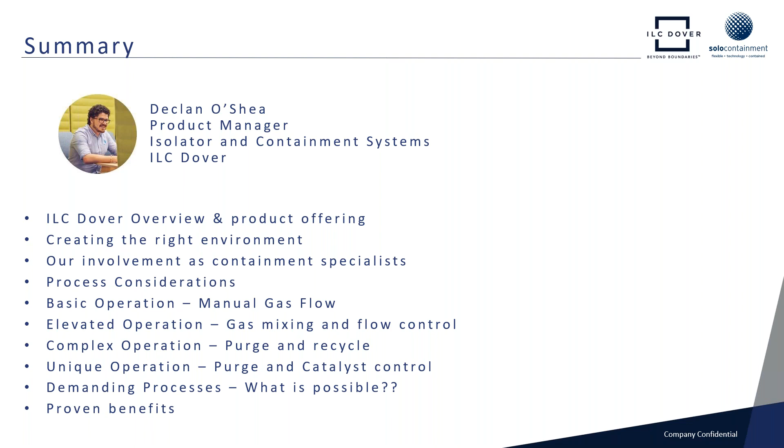So to quickly start with ILC Dover as a company, primarily we are a manufacturing and engineering company. We engineer solutions for our customers, turning requests, queries and problems into solutions, if you like. We started pre-World War II manufacturing latex products. ILC stands for the International Latex Corporation. And the Dover is because it's based just outside Dover in Delaware in the US. But we've grown from making army uniforms in World War II through to making spacesuits for the NASA missions. We still do that today.

Through to making a lot of pharmaceutical products, making single-use bag systems for powder transfer, powder containment. Now moving into the biologic space with liquid bags and fluid transfer assemblies. And then we also make isolator systems, which I'm going to go over in a moment. We have presence all around the world, North America, Europe, and now a large presence growing in Asia. We've just hired just under 40 new people in Asia, with much bigger reach in that region, to see where our products can help out there.

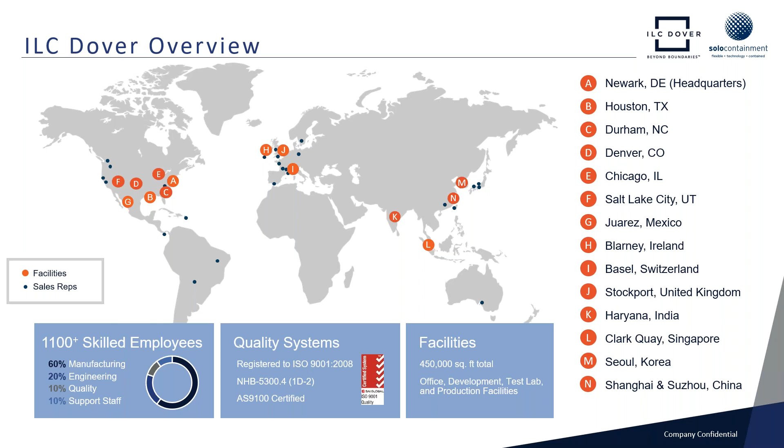So, I was touching on the products that we have, primarily in life sciences. We work in the pharmaceutical and biopharmaceutical industry.

Pharmaceuticals are a lot of powder transfer systems with flexible IBCs, powder bags for excipients and products. And then flexible containment systems, which is what we're going to talk about today. PPE, we have quite a broad range of personal protective equipment. And then on the biopharma side, we handle a lot of single-use powder applications, media, buffers, things like that. Sterile manufacturing isolators, creating grade A sterile airflow, and then liquid handling solutions in the form of 2D liquid bags.

Now, what I'm going to talk about today will be a crossover between pharmaceutical and biopharmaceutical, I would say. We've seen low humidity and low oxygen being required in both of these spaces, depending on the application. And then some of those applications are what we're going to go over today.

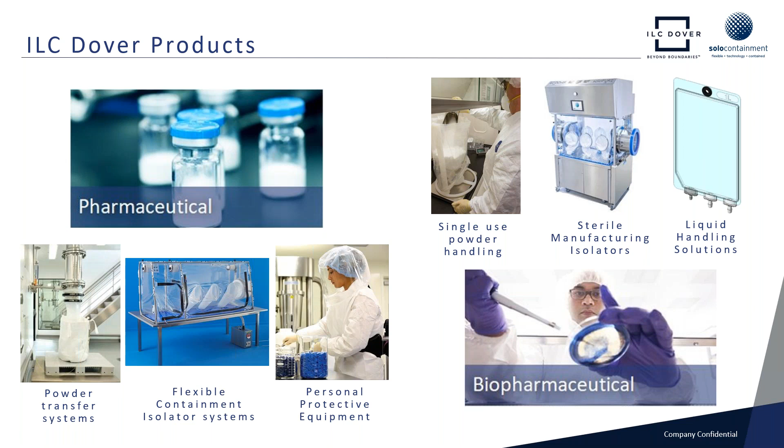So to kick things off, when I talk about an environment, what I'm saying is that generally, in order for your product to be handled inside of a place where you are not going to see any cross-contamination or any adverse effect while handling the product, and the same where you're not going to induce any hazardous effects to your operator, you are generally creating an environment that is suitable for both sides of the process. So yes, you can call it containment, you can call it an isolator, but realistically, how the air flows in and around the system is what creates that suitable environment and that working space for the product and operator.

So going through some of the different examples, if we're talking about cell banking, a lot of the time you're looking at low oxygen anaerobic environments, for which we talk about nitrogen gas saturation, which is the topic of today. Then move to something like ADC compounding, where you're looking at highly potent toxic materials. You'd be looking at a high containment system using a closed barrier, negative pressure airflow. Or maybe you're looking at fill finish, where we look at a sterile environment with a low particle count, low bioburden, in order to maintain true sterility in that process.

And then maybe you're looking at dry powder inhalation. You need a low humidity in order to prevent any moisture gain there. And then we'd look at compressed dry air saturation, which again is something we're going to talk about today, and then talk about the difference between these. But what I'm trying to get across essentially is that you can pretty much utilize most systems to operate in, but if you don't create the right environment for your product, your process is not going to work correctly. So I'd just be cautious when you're looking towards handling specific products or processes that you consider what environment you're going to be using.

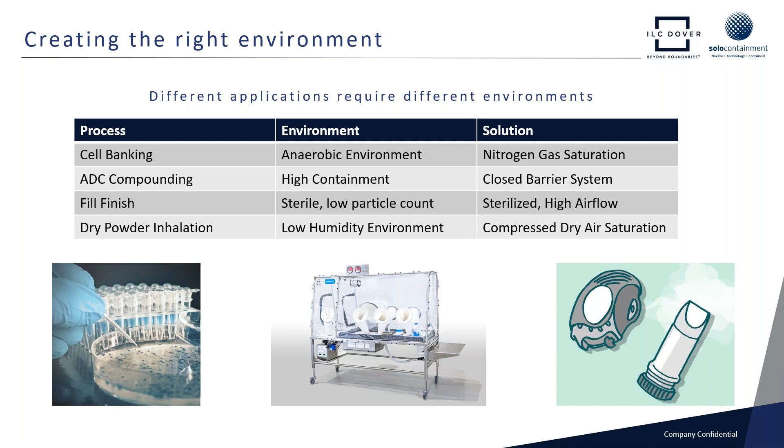So, how can we speak towards what we're speaking to today? My experience comes namely from being in the sales team, sales engineer, then a sales manager, then moved to be a product manager. And really, it's the fact that as containment specialists, we are approached by customers with a broad range of applications across all industry sectors, not just life sciences. So we're approached by the nuclear industry, the atomic industry, for any sort of containment application where there is a requirement for containing hazardous materials or protecting a product inside. In the nuclear industry, for instance, there are a lot of anaerobic glove boxes that are used, and we see requests coming in from that side.

And I'd say, as a company, we see maybe 3,000, 4,000, 5,000 different opportunities and inquiries every year. We don't necessarily convert all of those, but we do gain experience every time we approach a new opportunity as far as saying, how can we solve this? And then we tie all those combinations together to create a single portfolio of new product innovations, which can lend to all the markets by using the experience of different sectors. Because ultimately, containment is required all over, not just in pharma and biopharma. So we try and lend those experiences to cater for those sectors.

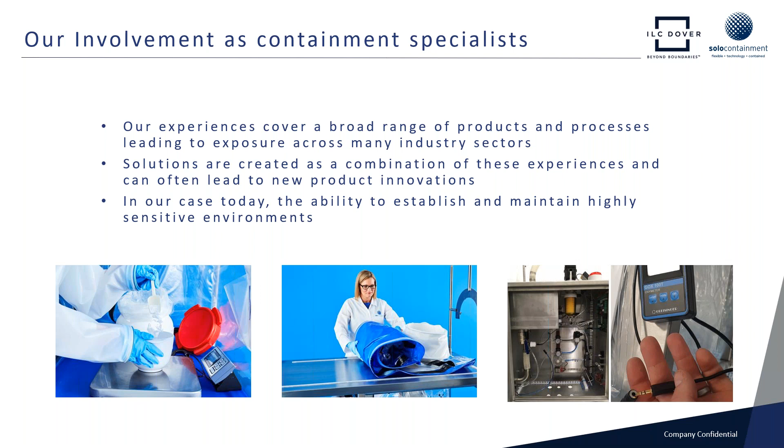So, process considerations. You're going to ask yourself at the beginning of your process, or before you even conceive how you're going to do this, what is the best way about doing so?

I know, for one, that I'm going to need a low oxygen environment. We need to work under sort of 1 or 2% oxygen in order for this product not to oxidize and change form. If you do, then that product will be lost, the batch is lost, and then that's money and time down the drain. So you need to make sure you observe those conditions inside. So what is the best way to go?

So realistically, when you're looking at gas usage, a lot of people will ask, what gas do you recommend? The most common is probably nitrogen. Second comes argon. But really, any inert gas, or a heavier gas than oxygen to offset the oxygen content within the closed chamber, can really be used for any of these applications.

We just generally find that nitrogen is a lot easier to generate and come by, be it in bottles or with a nitrogen generator on site. Generally, a lot of larger facilities will have those. That's generally what you're going to be needing.

Sometimes in extremely low conditions where you're looking at maybe ppm or sub 1% oxygen levels, you'll be looking at pure nitrogen or pure inert gases in order to really obtain the levels that you're looking for. I know with certain anaerobic cell banking practices, some of the levels you're looking at is 100 ppm, 10 ppm in some very rare occasions. And for that, you would require an extra pure form of nitrogen in order to ensure that the oxygen content has been scrubbed down.

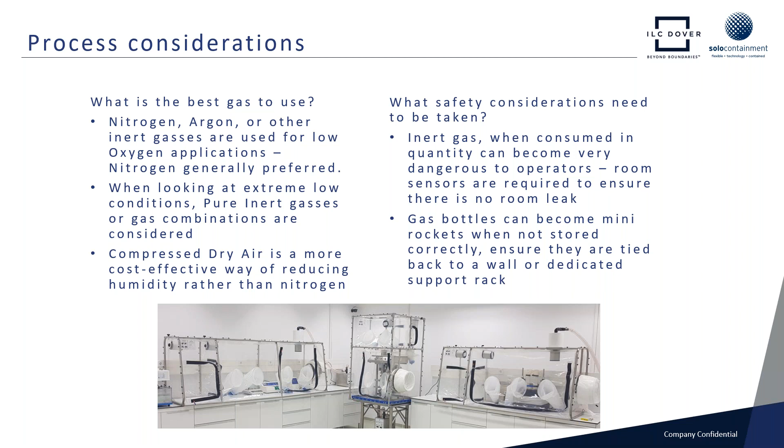And then more of a practical concern, things like gas bottles can become, I just put here, mini rockets. Essentially, if they're not handled properly, if they're dropped or ignited in any way, then there can be grave concerns with those things flying around the room. So please ensure that they're in a dedicated rack or tied back to a wall, or consider your safety concerns when handling those.

Now, what we're going to get onto now is essentially the 4 different types of systems, based upon the levels of control that you require. So when you're looking at obtaining environments inside of an isolator, not all of the time you're going to require such strict considerations around your process. Sometimes you may not require 1% relative humidity or 1% oxygen or even 10%. You might just want to provide a blanket for a very basic experiment where you know that you need below 10% oxygen, maybe 20% content inside.

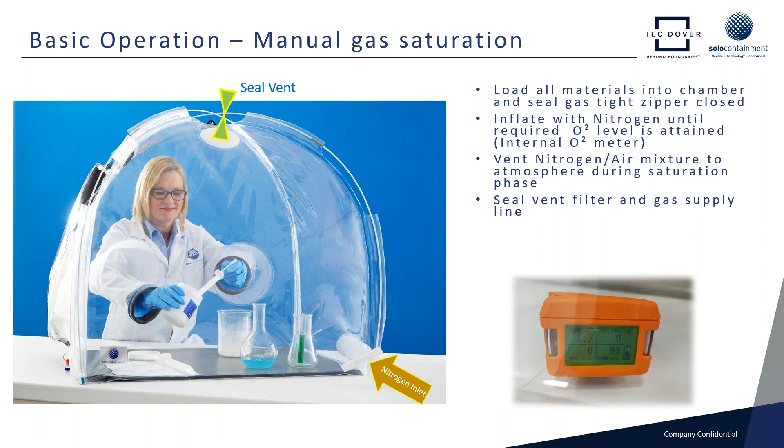Inflate the containment system with nitrogen. Have an O2 meter inside so you can read the oxygen content as you go. Make sure that you're venting the nitrogen off the top of the isolator through the sleeve provided, so it doesn't blow up exponentially and then possibly rupture the system. It would take a lot, but it is possible. And then just balance that gas supply manually with a sort of trickle feed in order to maintain the oxygen content that you require. We, of course, can show you exactly how to do this. We've got full manuals on how to operate basic systems like this, and for some people, this is pretty much all that you would require to create that very basic environment that you want at a very low relative cost.

Perhaps you're actually looking for something a little bit more. Perhaps you're looking for a more controlled environment, maybe some more accurate readings, something that you don't have to manually control. Then you consider the next step. You're not going to go the whole hog. You don't want a fully controlled PLC system. You want some kind of halfway system that will do for your process, that gives you repeatability. So when you look towards a system, this is just an example of one we've provided before, where you have a 6-sided contained system, and then you have a gassing tower on the side.

Now, this gassing tower would allow you to set a trickle feed of nitrogen or compressed air into the system in order to saturate the environment. And then the exhaust fan draws a pressure feedback from the main chamber to exhaust the air out at a steady rate that balances with the air coming in. So essentially, through some calculations that, of course, we will provide and set up for you, we could maintain a negative pressure based on the fan speed with the injection of nitrogen in order to keep a constantly saturated environment while you're working inside. Now, these systems have been proven down to around 1% oxygen content inside, in a relatively controlled state.

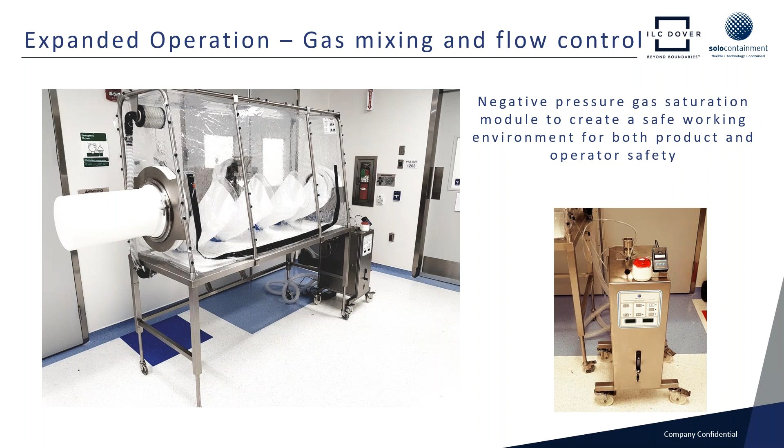So if you want to take things one step further, which of course a lot of people would do, if you're running a process that requires a lot more control and a lot more, let's say, reassurance in regards to the levels that you have, with a bit more flexibility, you could opt for a more comprehensive system. So you could look towards having an environment which was made of 2 chambers. Perhaps you wanted to load materials and pass them through, guaranteeing that you have the same environment in your antechamber as well as your main chamber.

But then you might also want to record this data. You might want to have feedback from the sensors. Maybe you're running under a 21 CFR Part 11 compliant data integrity scheme at your facility, and you need to record that data. Something like this would provide all of that for you, as well as allowing you to change the set points in order to say, okay, for this particular process, we're going to require a 5% oxygen content inside. We maybe don't need to use that much nitrogen for that longer time. So let's create that set point there.

And then maybe you're running a different process the next day, with a different product, single-use film. You can make the changeovers very easily and efficiently. And then you change your set point down to maybe 1% oxygen or relative humidity content for the next process. So a gassing unit like this with a versatile PLC will really allow you to change that process up in order to provide something that's a little more versatile than the previous 2 units that you've seen there.

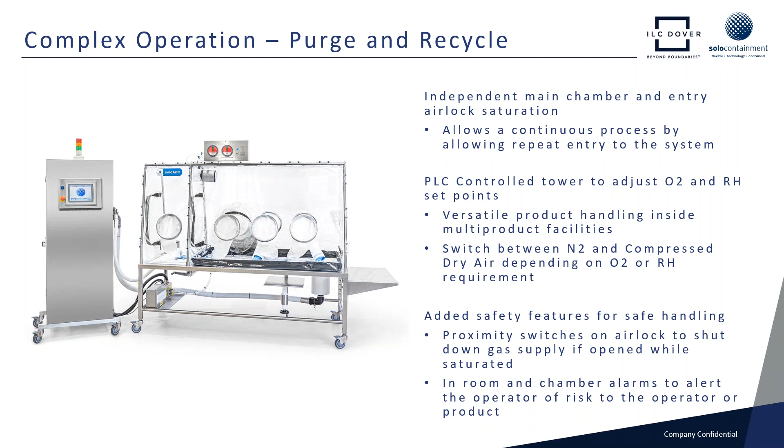Then the final one that we're going to talk about as far as examples for today is probably the most unique and certainly the newest for us: we, in cooperation with a partner of ours, have developed a system where we've created a single-use isolator chamber, which is a 6-sided structure that can be fully disposed without any required cleaning validation. You'd simply place up a new film and start on your next process.

But we worked with a customer that required ppm levels of oxygen inside their process. Now, this was for anaerobic cell banking that I mentioned before with a customer in North America. And what they required was a 10 ppm environment to be maintained for a number of days, a number of weeks actually. It was about 16 days in total that they needed to maintain this environment. So we knew, what do we have to look at here in order to ensure that we maintain that level of environment for such a long time.

Bear in mind that when we're talking ppm, this is parts per million of oxygen within a certain volume of air. It's unfathomable to consider these sorts of levels under normal circumstances. Hence why we sought to cooperate with a specialist that knows how to handle these environments. So what we did from an isolator perspective is we looked at all the possible leak pathways that could be developed when you have a system like this.

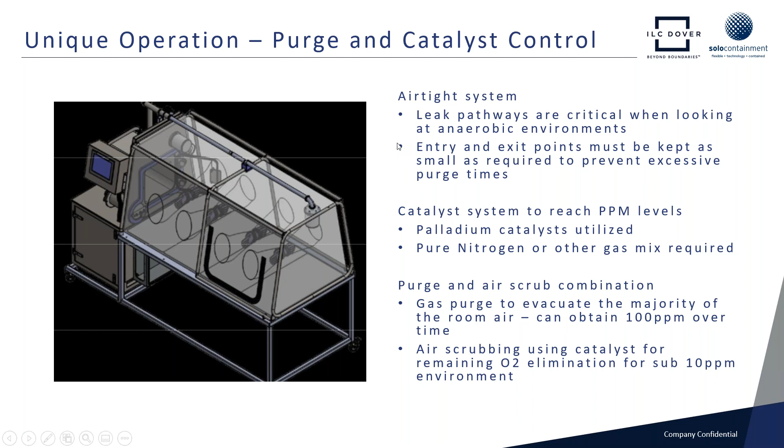Now, going on to something that might be a little bit more demanding. So I'm speaking relative terms with the previous examples towards a single process type. So I'm saying low oxygen, low humidity, using nitrogen or compressed dry air only to create that environment.

So I've come up with a few examples that we have here, and these are all examples that we've catered towards before. And as I said right at the beginning of the presentation, as containment specialists, we have a broad range of knowledge across many different industries that allow us to combine these together to create the correct environments and combine our previous solutions that we know have worked, independently, to bring them together to say, okay, we made this work in this way, we made this one work in this way, so how can we make them work together?

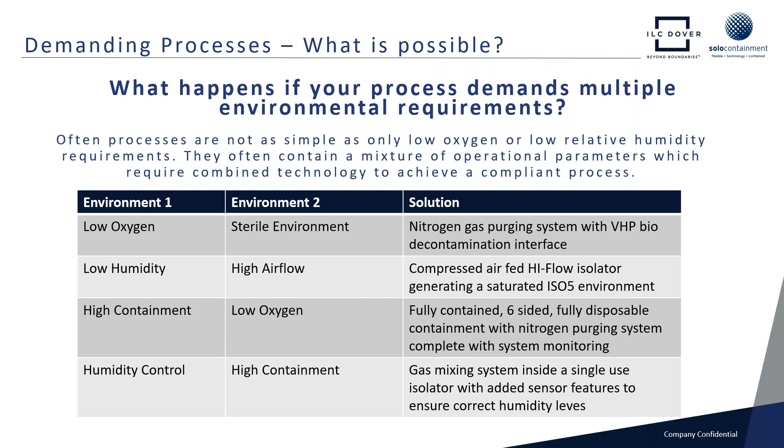So just because you may think that your process is a lot more complicated or has many different steps or considerations, it doesn't mean that there isn't a solution out there for it. You'll find that a lot of containment providers are approached by many different customers to contain many different products and processes, and often they can add two different processes together to come up with a solution that you're looking for.

So the one final thing here, just kind of take-homes for today's talk, is the choices that you put into it and safety really do matter. Before you run this process or even purchase any equipment associated, just make sure you're choosing the right sort of input. Are you using nitrogen where compressed dry air could be used? Are you trying to use nitrogen when you might need a more pure source of it in order to obtain lower levels?

What sort of impact is that going to have on the room and the facility and the operators around it? Sometimes people can jump feet first into these applications without truly considering all the background that might be required. So, take away what I've given you today to say, let's look into these other things. Am I suitable within the environment that I'm working in to handle this product or process? If yes, let's proceed with the equipment suppliers and say, we can run down this process. I know that my room and operators can cope with it.

Much to the same fact, always run a risk assessment on this process. You're handling something that is potentially hazardous to the operator here. Yes, you might not be handling a potent product and that might not be the immediate risk. However, inert gases are a risk, and I would say make sure you're well equipped for handling them within the space that you're looking at using.

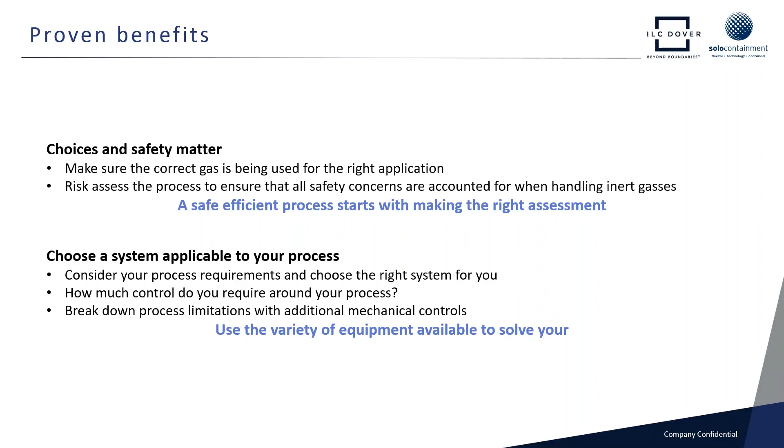So that's it for today. I understand it's a little bit shorter than the usual presentations that I have. However, I hope everybody has learned something from the handling of inert gasses today. And just know that there are lots of possibilities out there for creating anaerobic environments inside maybe a more cost-effective system, and maybe a disposable system if you're worried about cross-contamination or product contact or cleaning validation of any of the systems that you have.